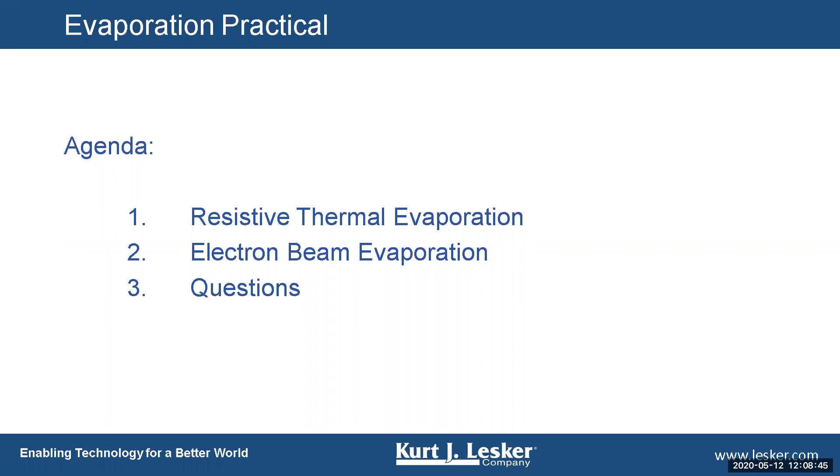So what we're going to cover today, as I said, is resistive thermal evaporation and electron beam evaporation. They're kind of tied together. One kind of technique builds on the other, and I will do my best to explain what you need to know in order to perform these things.

First comment is safety, because a serious matter is that I've known 2 people personally that have died using PVD equipment, and that's as many as I want to know. I don't want to know of anyone else that has died because they've touched the wrong thing at the wrong time. Way back when, this was a very wild and woolly kind of technology, and a lot was left to the imagination. But today, a lot of safeguards are built into equipment, and I'm happy to see that.

So hopefully, like I say, there is a lot of caution that needs, and a lot of respect that needs to be rendered to PVD equipment. Also, a lot of people don't think of it, but in evaporation processes, there's bright light, and the bright light can get quite intense, and there are ways to protect you from overly bright light by using things like welder shade. We use welder shade 9 here in Lesker when we're looking at bright evaporation processes.

So let's start on thermal resistive evaporation. Evaporation is a process where you're going to take a solid material and you're going to vaporize it one way or another, and then that vapor is going to condense out on the substrate and make a thin film, hopefully. Thin film thicknesses and properties are an end product of this process.

Liftoff is generally the intent of most evaporation processes, and the reason why is because evaporation happens at a relatively low pressure, and you get line of sight deposition from the evaporation sources, whether it be a resistive source or an e-gun. The evaporation process should not cause excessive heating of the substrate, because that can be very injurious to

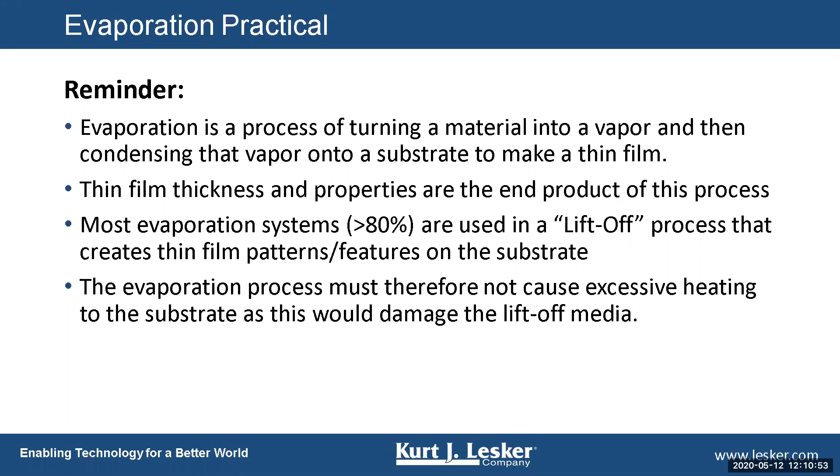certain kinds of photoresist. There are a ton of different evaporation sources. How do you know which one to pick? How do you know which one to choose? We can give you some guidance.

I'm sure you probably already have a general idea, but they're generally classified in 2 major categories. One is directly heated, where the material gets placed directly into boats, baffle boxes, or into spirals, or into coils. You can actually shove little pellets in the coils, and it does work nice. People have made canes out of certain evaporation materials, and they put them on loops to evaporate.

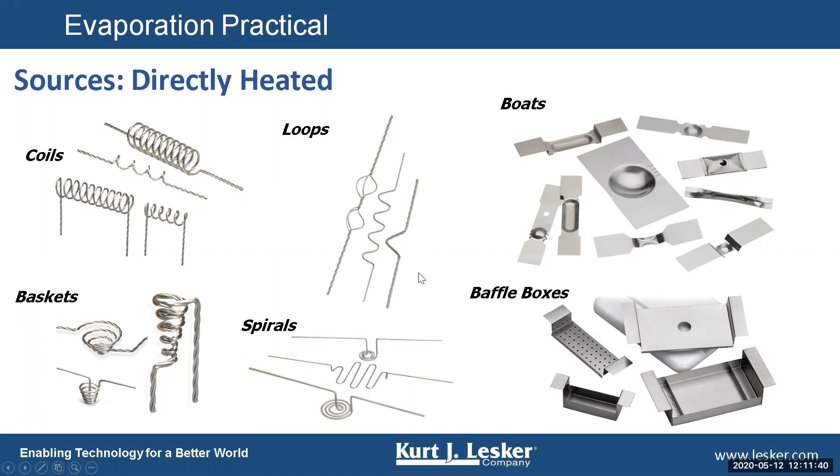The other kind of source is indirectly heated, where you put the material inside of a crucible, and the crucible then gets placed inside of an indirect heated source, a box heater or an LTE or an effusion cell, something of that nature, or a coil basket heater.

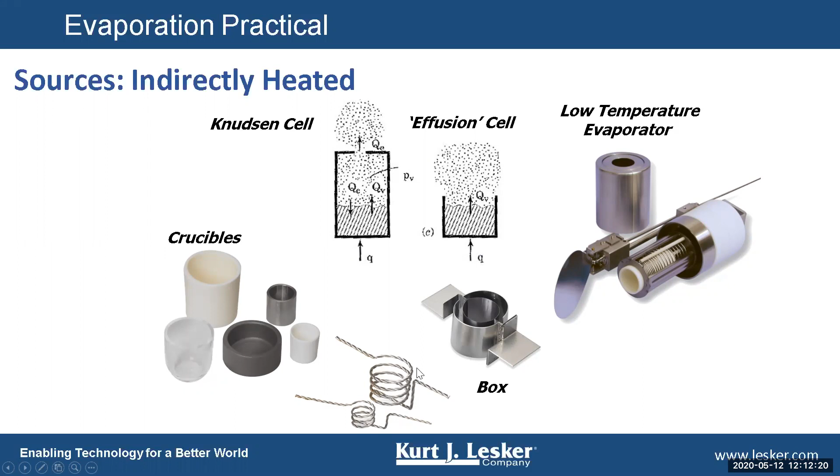Understand that the heat is generated by the resistive source, and it has to travel from the source through the crucible and then into the material. So the thermal conductivity path is a little indirect here, and that's why these are known as indirectly heated sources.

There are many different considerations which source to use, which boat or box heater or coil to use. Geometric considerations are one, how the system is laid out, what size source can the evaporation posts hold, and that kind of dictates where to go from there.

The size of the power supply is important as well. It's really important to know what the voltage and current outputs are for your power supply, and I'll get into that a little bit later, because it will define the boat or an adequate boat that you can use.

Material compatibility is also an issue because certain materials, when they go in liquid form, can interact with boats. If they go into liquid form, they can destroy boats, they can destroy crucibles. I'll touch a little bit on that briefly. The type of material being evaporated also determines really which source is best. And bottom line is the thickness of the film also is going to dictate what size evaporation source or boat to use.

Distance between electrodes: here you see a cluster flange of 3 or 4 evaporation sources, and from post to post the evaporation source spans. This length is critical to know because if you're ordering a new boat or reordering boats, it's important to get the right size boat.

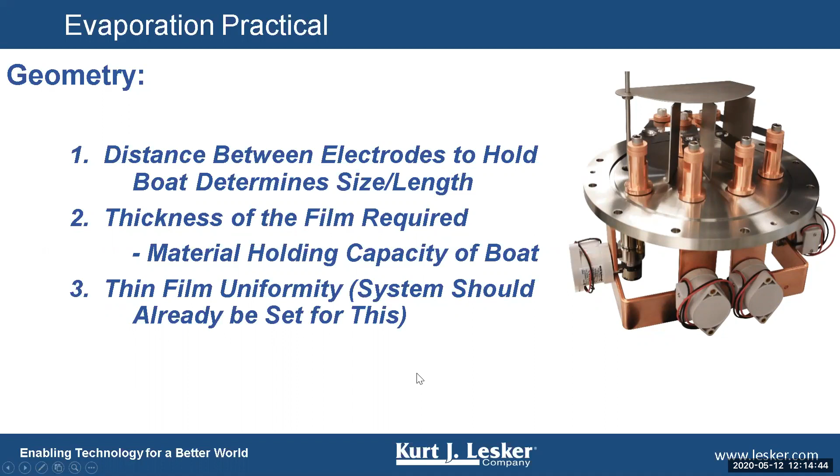Thin film uniformity is also affected by the position of the evaporation sources in relation to the substrate. This should already be set in any system you're currently using, and it should have been designed so you get relatively good uniformity.

All evaporation sources, if you go to anybody that sells them, will usually list on their website or catalog the voltage, current, and power required to get the evaporation source up to a certain temperature. These are useful numbers to know and consider when choosing a boat or box heater.

What happens if your power supply only gives off 2 volts max and it's limited to 200 amps? Certain sources require more than 200 amps to reach a critical temperature, so it's important to consider the output of your evaporation power supply.

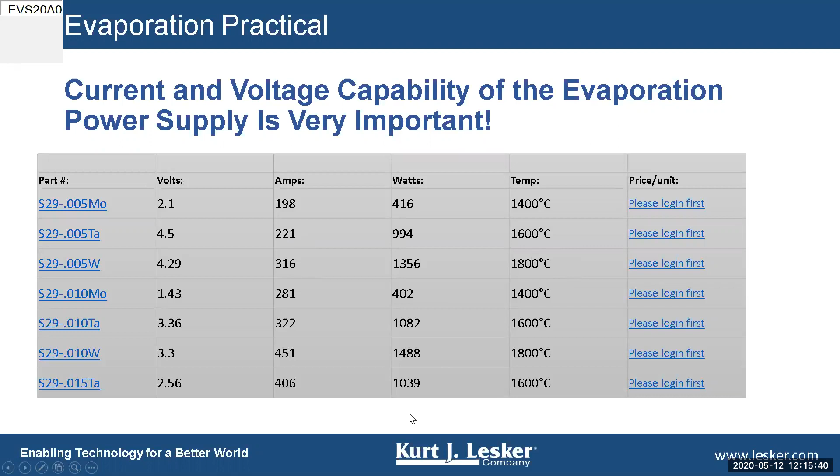When it comes to material compatibility, one considers materials that sublime. Generally, they don't interact with the boat or crucible holding them, and as a rule they work fine in just about any kind of boat or crucible material.

Most materials that melt stand a good chance of interacting with the evaporation source, so you have to be cognizant of that. Generally, experience is a good indicator—people usually know what kind of boat material works with a given material.

Gold, palladium, and nickel generally use alumina coated boats or alumina crucibles to heat them up—we're talking resistive evaporation here, not E-beam. The Al2O3 coating prevents the gold, palladium, or nickel from wetting to the boat, so you can pull the material out in many instances after evaporation, since it doesn't wet to the Al2O3 coating.

Titanium is a common material for resistive thermal evaporation. I tend to only use cheap tungsten boats at least 15 thousandths of an inch thick. You can almost guarantee with titanium you'll only get one use per boat, because it will dissolve, interact with, and pretty much destroy the boat after one use. Generally the layer thickness after that one use—if you're shooting for 100 or 200 nanometers—should be okay, but anything much more than that won't work for titanium, though I realize titanium is usually a thin layer.

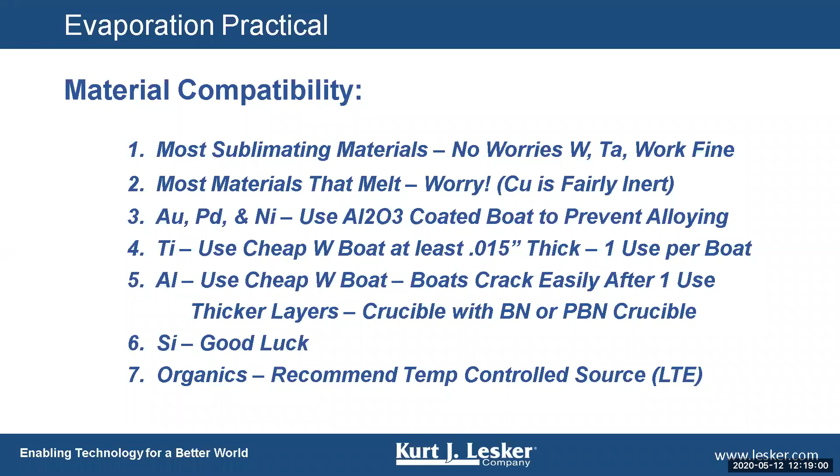When we talk about evaporation, we're basically talking about evaporation rate, which is somewhat equivalent to the vapor pressure of the material. The material's vapor pressure is dictated by its surface temperature. The hotter a material gets, the more it approaches its evaporation point, and the colder it is, the less likely it is to evaporate.

For normal deposition geometries, we consider a material vapor pressure of 1 × 10⁻² torr high enough to give a good deposition rate—I'll show you a chart in a second that covers that. I'll use the term evaporation temperature to mean the temperature required to raise a material's pressure to 1 × 10⁻² torr.

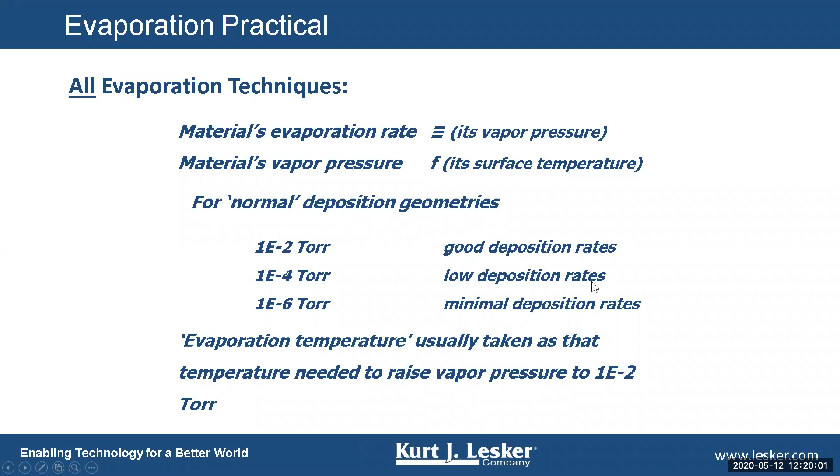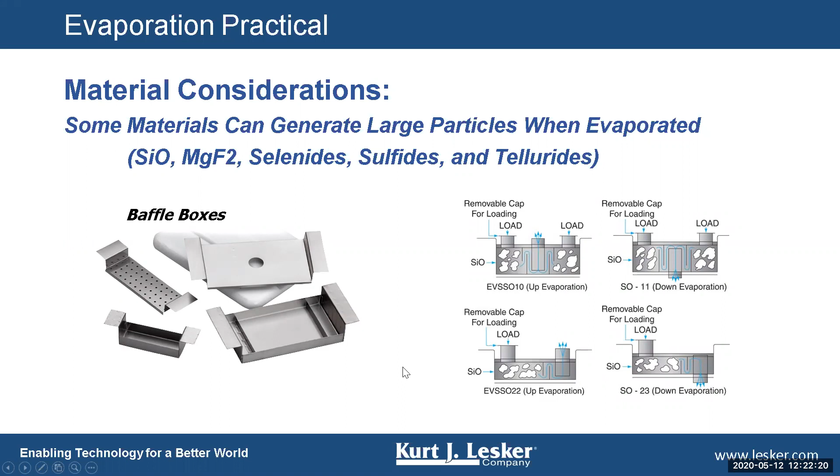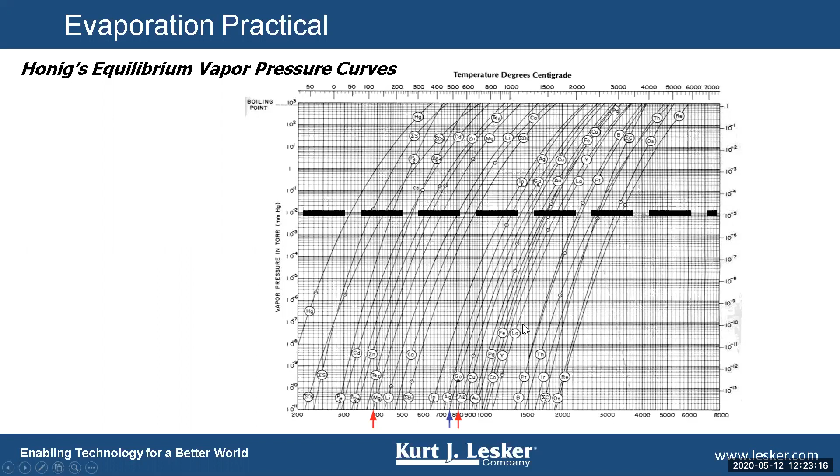When evaporating alloys, they really don't work too well unless their vapor pressure temperatures are relatively equal. For example, if I could make an alloy out of osmium and cadmium, and started evaporating it, cadmium would start coming off at around 260 degrees C, while osmium wouldn't even sneeze at that temperature. So if you heat an alloy like that, you'll get all the cadmium coming off and be left with a clump of osmium. More or less that's true — there are some liberties taken there, but more or less it's accurate.

As we covered, organics are better done in a temperature-controlled source where you can apply power and monitor the temperature. There's a thermocouple inside these sources — the crucible sits on the thermocouple, and you're able to heat the source based on temperature.

With refractory metals, a lot of people say, 'I want to resistively evaporate tungsten, tantalum, platinum,' or some other very high temperature material. Most of those are better done via E-beam, and some are quite impossible via resistive evaporation.

I want to caution you — I have a way of doing evaporation I've developed through the years. It's my way, not the only way, and I'm going to tell you how I do things. Please take it with a grain of salt. I'm more interested in the theory behind why I do what I do; the exact procedures I'll leave up to you.

You decide how you want to pattern your evaporation runs, and these strategies apply to resistive thermal evaporation as well as E-beam evaporation. I'll cover this again when we get to the E-beam section.

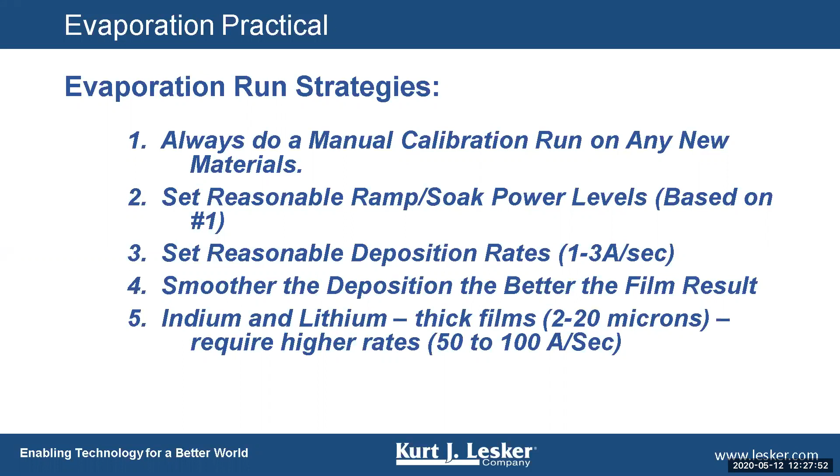So a manual ramp soak, and this is the layout of what I do: I slowly increase the power of the evaporation source until I hit my desired deposition rate, and I record that power level. Generally, most controllers allow you 2 ramp soak levels: ramp 1, soak 1, ramp 2, soak 2.

And at the end of soak 2, I want to have the material conditions such that I am already at my evaporation rate. That way, when I go to PID loop control or auto rate control, my PID loop does not have to search for that control point. It's there. Generally, this produces a relatively smooth transition between the manual ramp soaks and the PID loop control.

The one thing you're trying to prevent is oscillation of the power when you go into PID loop control. Generally, that oscillation in power is caused by soak 2 ending at a power much lower or much higher than the desired deposition rate power.

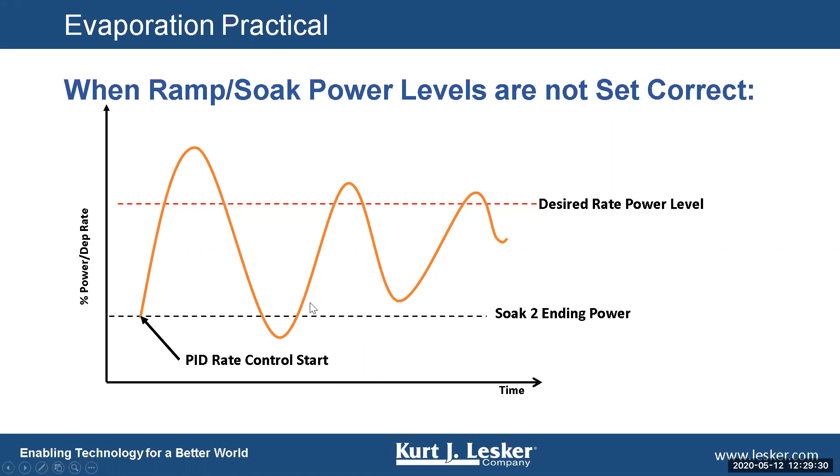This oscillation of power can be very destructive to both the boat or crucible holding the material, as well as injurious to the film you're trying to make on the substrate, because in these wide power swings, you'll get material spitting. Generally, you'll get large particles included in your films at this time.

Some of the quirks and qualms to any kind of evaporation process is that if you have to vent the system, sometimes the materials you're evaporating can form oxides or nitrides readily when exposed to ambient air. This might require an additional ramp soak in order to first burn off or burn through that oxidized or nitride layer when you go to reuse this material. So try to keep that in mind.

Generally, if something evaporates at, say, 20% power, and it's consistent 20% power run after run after run, and all of a sudden it's taking 30% power, there's something wrong there. Either there's not enough material in the boat, or maybe the material is oxidized or nitrided. Just keep that in mind.

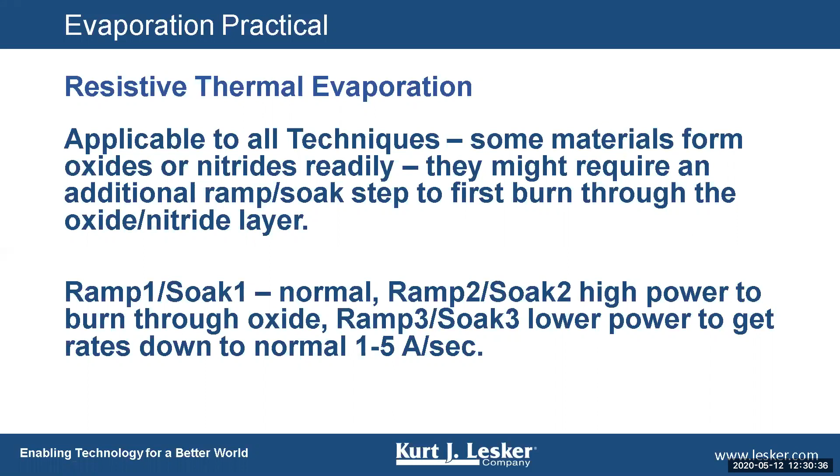Not everything runs off of a 2-stage ramp soak. Some things need 3 steps or maybe even 4 steps.

Atoms, though, have less than 1 eV of energy on arrival at the substrate. This means that film formation can be kind of clumpy, and I'll touch on that a little bit later. But there are ways to augment this energy level either through ion beam assist or heat on the substrate.

Either one can work. You're trying to get a higher energy level so that atoms have more mobility on the substrate and are able to form a smoother film that way.

Rate control generally is dependent on a quartz crystal monitor. It's very important to set up quartz crystal monitors correctly, and I may have the opportunity to touch on that at the end of the talk.

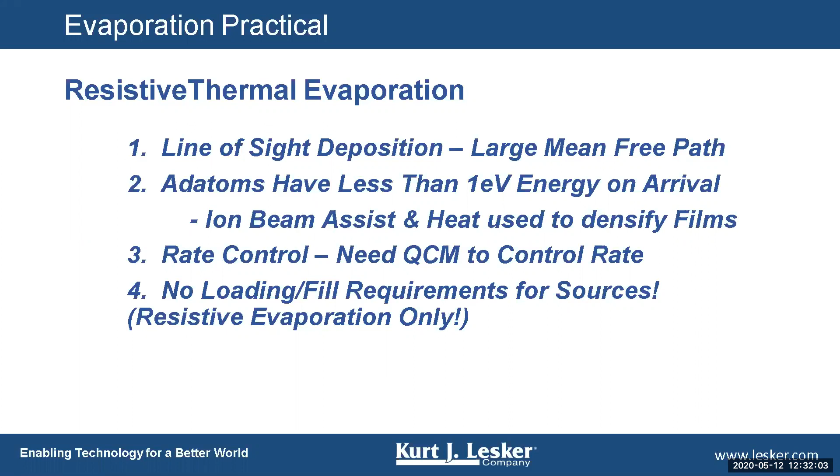In resistive thermal evaporation, and this is what's different from E-beam, there's no loading or fill requirements. Basically, you only put as much material in as you need to make the film thickness that you require on your substrate. One can do that calculation as well, and I will touch on that later.

On the Thornton film growth model, you're dealing at the low energy level with thermal evaporation. So basically, you're getting columnar film structures that can be smooth or not. Generally, you're in zone 1 or zone T, early stages of zone T, depending upon the material.

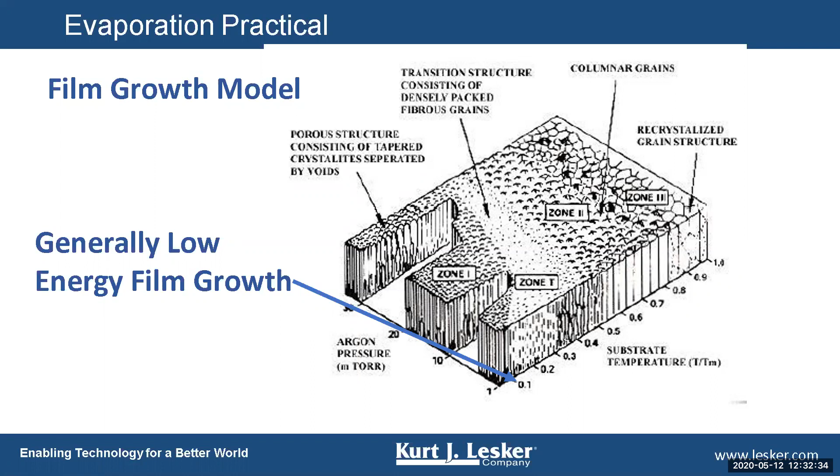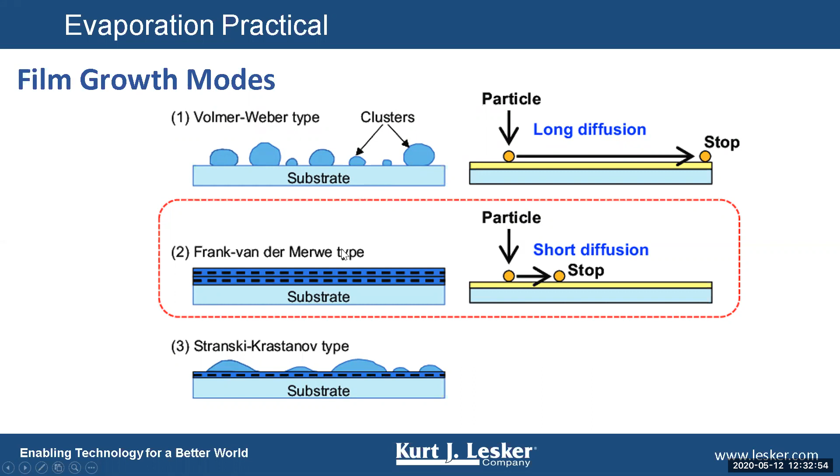Everybody tries to work toward Frank-van der Merwe type film growth, but generally with resistive evaporation, at low energy level, you're going to probably get a combination of Volmer-Weber and Frank-van der Merwe type film growth.

An important factor in any evaporation process is what base pressure do you start at? I ask this question of most anybody I encounter, especially if they're having trouble with film quality. What's your starting base pressure? If I start my evaporation process at 1×10⁻⁶ torr, the natural arrival rate of water vapor coming off of the walls at that base pressure is enough to accrue 1 monolayer of water vapor at the substrate every second. That's a very heavy duty water vapor flux, and there's very little you can do about it.

There are 2 ways around a high water vapor flux. One is pumping down to a lower base pressure. At 1×10⁻⁷ torr, I form 1 monolayer of water vapor at the substrate every 10 seconds. At 1×10⁻⁸, I'll form 1 monolayer every 100 seconds. So I can pump down to a lower base pressure, or I can run at a higher evaporation rate, and that will tend to dilute the contaminant water that's present in the vacuum system.

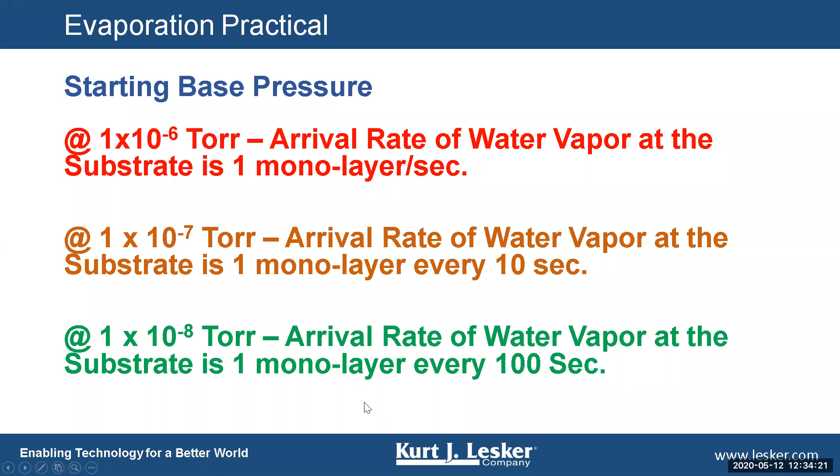Common problems with resistive thermal evaporation are stress on the boat or the basket heater when tightening down the source into the system. There is a trick there: you want to try to keep as much torque off of the boat or basket heater as possible, while still getting a good tight connection between it and the evaporation post.

Generally, when somebody has trouble with excessive power requirements, one of the things that might be occurring is they don't have the ends of the boats tight, or the electrical connection made well enough between the post and the boat.

You can also overfill evaporation boats, and this is especially true the smaller the boat size gets. Ultimately, you can bridge the distance between the electrodes with the material you're trying to evaporate, especially if it goes into liquid phase before evaporating. Picture a small boat filled with 20 copper pellets. If I heat the pellets high enough so that they melt, I can get a bridge of copper between both electrodes, and the resistance of the boat will go down. You'll need a lot more current before I can get the copper to evaporate finally, and I might be out of the current range of my power supply.

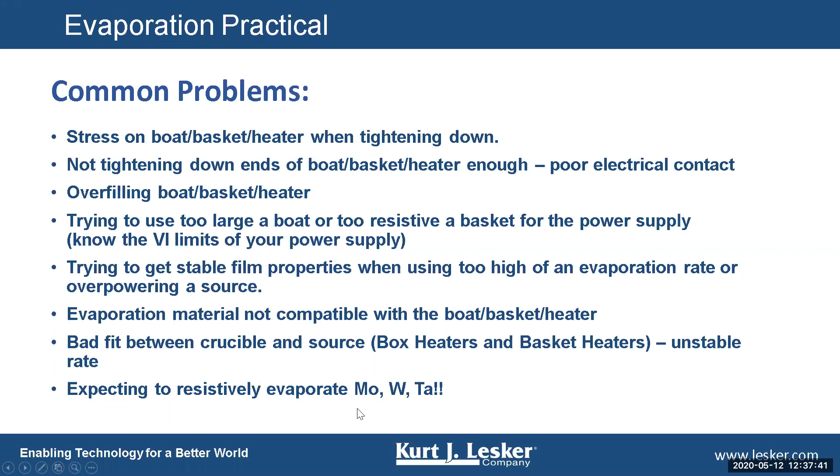How much material do I load in the source? If I only need to put in the evaporation boat as much material as I need to make a film of a required thickness, how much can I calculate that? And the answer is yes.

If one views the distance between the boat and the substrate as a hemisphere, and calculates the surface area of that hemisphere, then adds the thickness of the film I would like to make, all in centimeters, I can get a volumetric calculation of how many cc's of material I need to create that layer of a given thickness. I usually add about 20% more to be safe, but it's quite easy to calculate.

So that's a quick tour of thermal evaporation. If anybody has any questions, please save them to the very end. And if there are no objections, I'll continue on to electron beam evaporation.

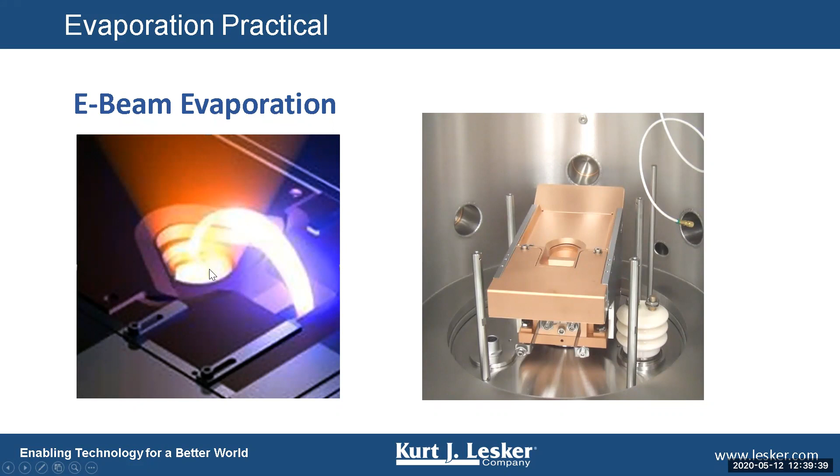This is a neat picture of the electron beam crashing into the pocket that holds the material. And this is a little bit better diagram of how this actually happens.

You have an electron emitter, which is a tungsten filament. You run a relatively low voltage, high current through that filament, and you bias it with a high voltage in reference to the anode section. What happens is an electron beam starts coming out of this filament.

This beam is somewhat guided by the anode optics. It's also guided by a permanent magnet that sits in the back of the E-beam gun, usually. The beam is curled or turned via the magnetic field, and it's steered by an electromagnet that usually exists in front of the gun to create the sweep patterns.

Very basic view. The thing to note here is that the electron beam gun is actively water cooled, and the hearth pocket that the crucible sits in is actively water cooled as well. This tends to keep the crucible liner, the material-holding crucible liner, relatively cool.

So the interactions between the material I'm E-beam evaporating and the crucible liner are somewhat minimized by the fact that this crucible liner is being water cooled.

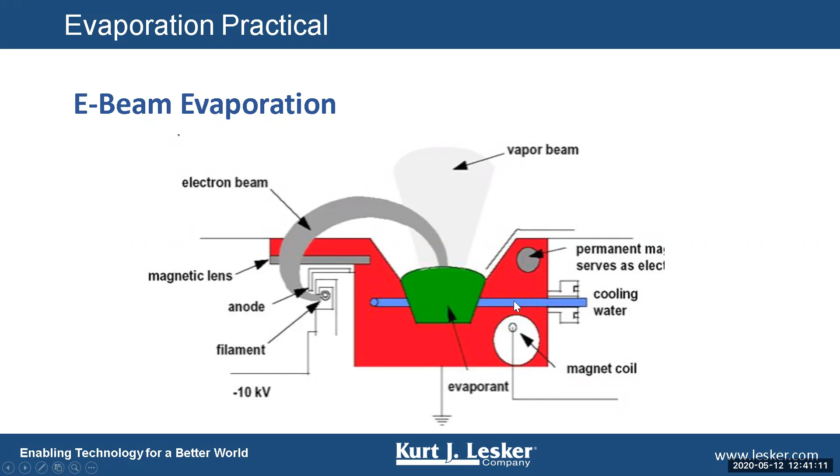It's been my claim that electron beam evaporation is probably one of the most complicated techniques in PVD. It's not well understood. People think, hey, I push a button, the power comes on, the beam is generated, and poof, my material evaporates.

It's actually a lot more complicated than that. The other drawback to E-beam evaporation is it usually runs off relatively high power, and at high power the danger of damaging the E-gun or the system increases. So E-beam is a very useful technique, but it can also be a very destructive technique if you don't use it or don't understand it.

Most any material, including refractory metals, can be E-beam evaporated. But higher vapor pressure materials, materials that need very little heat to get large vapor pressures, are usually not a good choice for electron beam evaporation.

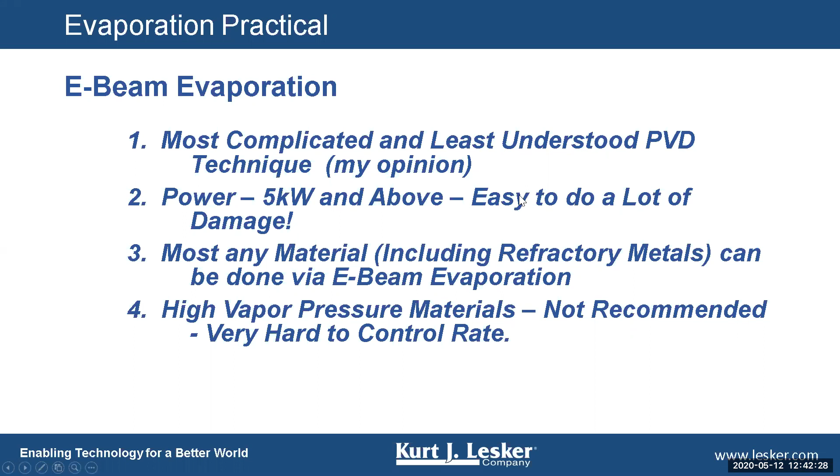If you can understand the thermal conductivity through the E-gun, you will be able to evaporate any material you want in an E-gun, even using a relatively small power supply. Thermal conductivity through the E-gun is very important to understand because it'll explain any kind of aberrant behavior you might see.

Basically, when the beam hits the material inside the crucible liner, the heat is transferred through the material, through the crucible liner, and then into the water-cooled hearth pocket, and hopefully out of the coolant into your cooling system.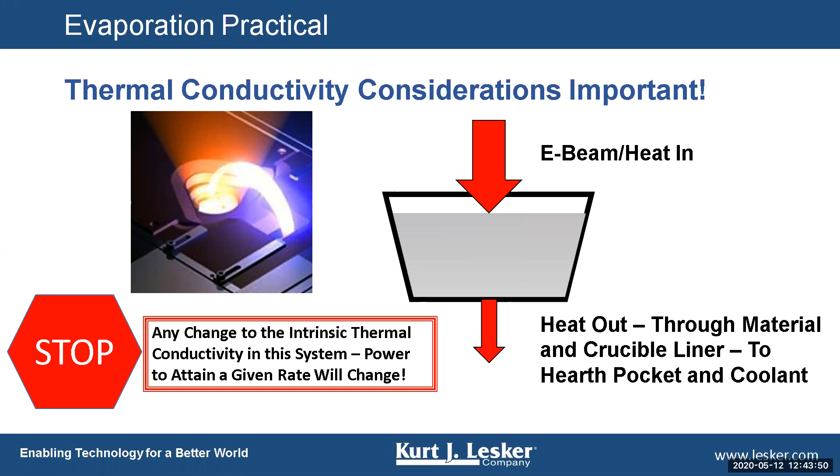So any change to this intrinsic thermal conductivity path will lead to changes in power needed to get a given rate. A lot of people have problems with consistent power for a given evaporation rate in E-beam, and generally it's because the thermal conductivity equation has changed in the E-gun.

A couple of different ways that can happen is if the crucible liner cracks, you can get material leaking out of the cracks and that touches the hearth pocket directly. When this happens, it'll require more power to get to a given evaporation rate, primarily because the thermal conductivity has increased.

Also, if I overfill the crucible liner, I tend to splash over it, and the material can then directly touch the hearth pocket as well. This creates a good thermal conductivity path, and again I'll need more power to evaporate the material at a given rate.

Some people are very poor housekeepers, and they can let material accrue in the hearth pocket area. I've even seen an instance where somebody left a pellet in the pocket, tried to put the crucible liner into the pocket over top of the pellet, and got all sorts of disastrous results because of this. So in these instances, the thermal conductivity path in the E-gun has changed, and it will cause a change in the evaporation rate.

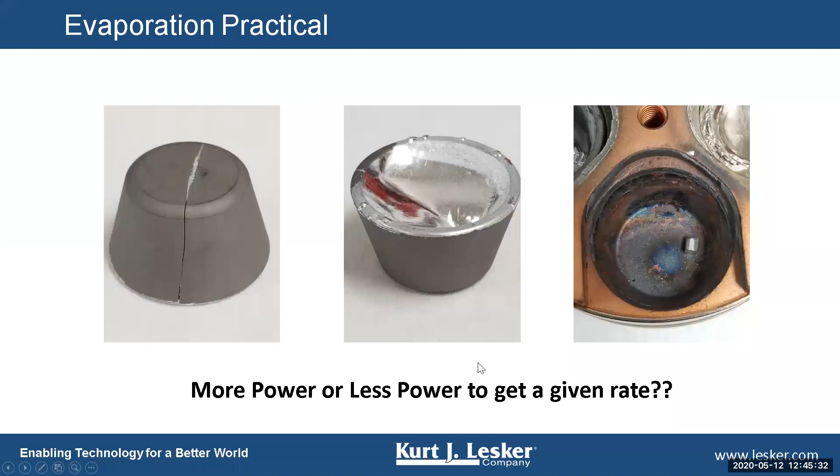E-beam evaporation guidelines are basically the same as the resistive thermal guidelines. A smooth process is always desired. You have a couple of different manual ramps and soaks that you can play with. Also, you need a quartz crystal monitor to help you control the rate.

There is a fill requirement on these crucibles that go into the E-gun. Generally, as a rule, you want to make sure the crucible is at least two-thirds full of material. A lot of people, when they go to E-beam gold or platinum, might only put one or two pellets in the crucible. It can work that way, but generally what happens is the beam interacts with the crucible and you wind up contaminating your material or destroying your crucible liner.

Generally, as a rule, I like to use higher voltages if you are running an E-gun where you can change the voltage. The higher voltage is generally used for metals, 8 to 10 kV, and then lower voltages are usually reserved for sublimating materials.

Key here is when you change the voltage in any given pocket, you have to redefine the beam limits. If you don't redefine the beam limits, your beam can wander in or out of your pocket. So if you change the voltage that a pocket works at, it's very important to reset the pocket limits.

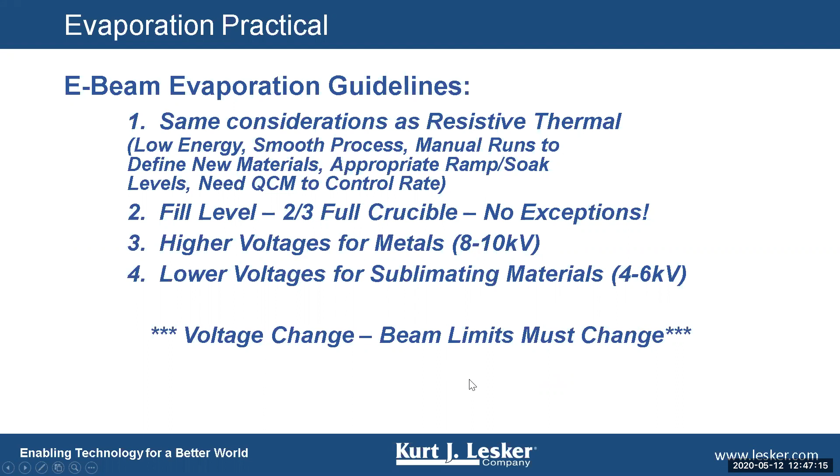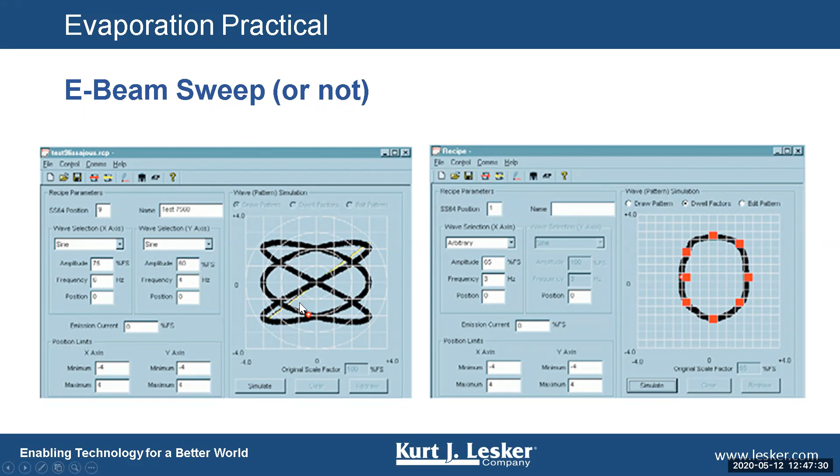People are overly fascinated with the ability of an E-gun to sweep its beam. I try not to pay a whole lot of attention to that. Generally, as a rule, I use a sweep for sublimating materials.

For materials that sublime, like Al2O3 or SiO2 or even chromium, I try to use as diffuse a sweep pattern as I can make. Generally, the E-gun allows you to do various things to diffuse the sweep. I also use a very slow frequency and a relatively large amplitude for the sweep.

This is all in an effort to abate core drilling through the material. It's quite possible to core drill through sublimating materials and then drill a hole through your crucible liner before you reach your layer thickness goal. You don't want to do that — you endanger the E-gun when you do that.

I use a sweep to pre-melt most metals though. Usually some metals don't melt at relatively low powers, like titanium. What I'll do is fill the crucible liner up with titanium pellets, then manually ramp the power of the E-gun up, and manually steer the beam around the pocket to pre-melt the titanium. My theory on this is the smoother the surface of the melt, the more consistent my evaporation is going to be. Not quite possible with sublimating materials, but with metals that melt, I can do a pre-melt, and usually the evaporation process runs smoother that way.

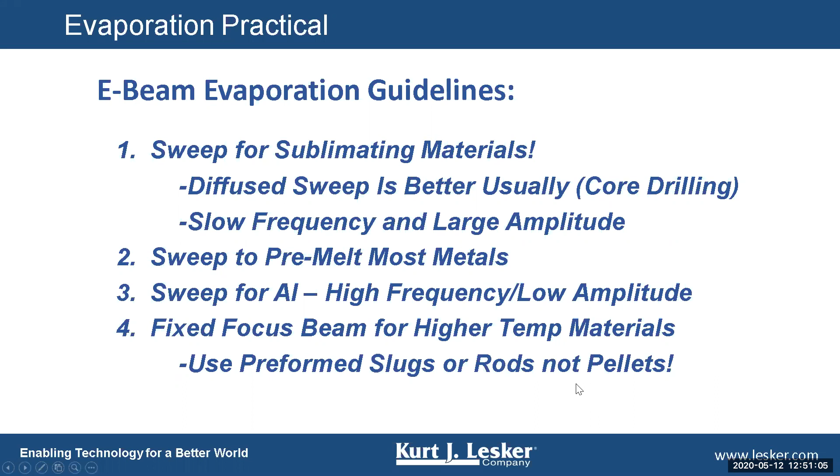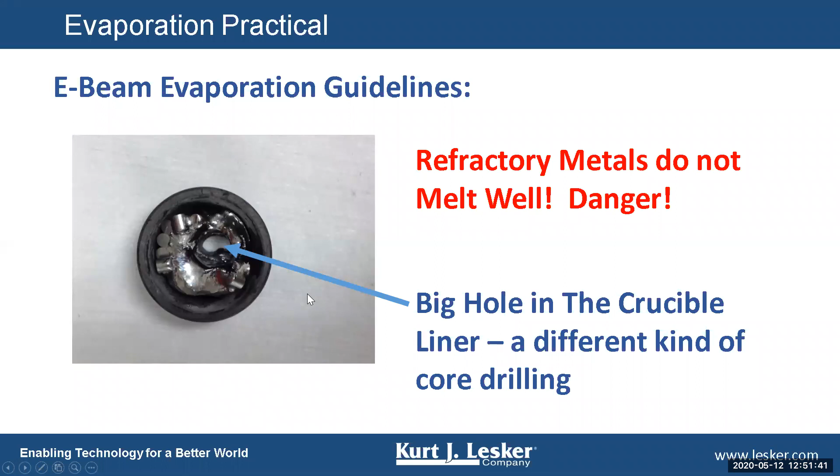This is a picture of something that I did. I believe this was molybdenum, moly pellets, and I turned up the heat, and the pellets just sloughed away as they were melting, and it exposed the bottom of the crucible. This happens in a few seconds—it can happen in a few seconds at high powers on your E-gun, and the results can be quite disastrous.

The same basic plan applies to resistive thermal evaporation. When I'm dealing with a material I do not know, I will always do a manual calibration where I'll run the power up on the E-gun manually until I hit my desired deposition rate, and I'll note that power—that'll be my ramp 2 soak 2 power. This is in an effort to get a very smooth evaporation process once I go into PID loop or auto control mode.

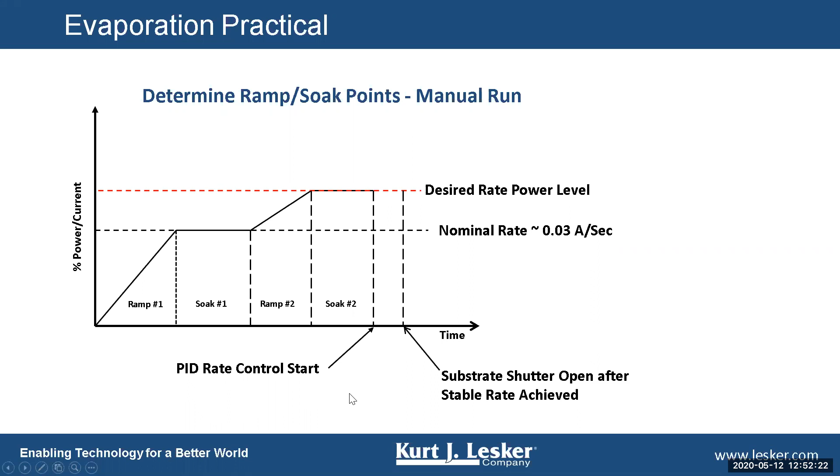In E-beam evaporation, if I get oscillations when I go into PID loop control, these power oscillations can cause the material to go from liquid to solid quite rapidly. If the material wets to the crucible liner, like aluminum, these rapid transitions from liquid to solid over the course of a couple seconds will tear apart any kind of crucible material—it'll happen to metal crucible liners, it'll happen to graphite crucible liners. So the point is you want as smooth an evaporation rate as possible once you go into PID loop control, to avoid these power cycling, power ringing kind of events.

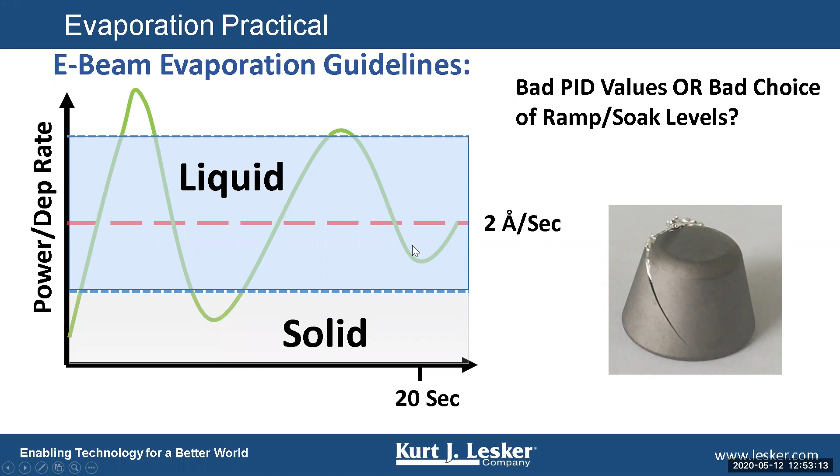With electron beam evaporation, you can get ungodly rates if you want. I've tried and gotten 200 angstroms a second easily with aluminum using an E-gun. At those higher rates though, the films come out terrible—I can't overemphasize that enough. I've been doing E-beam for quite a long time, and most of the films I've made usually work better at relatively normal rates, which I classify as between 1 and 5 angstroms a second. On E-beam, it's quite easy to control the rates on good thermally conductive metals down to 0.1 or 0.01 angstroms a second if need be, and I've done that as well. It's just a matter of doing the manual calibration and having a good calibrated quartz crystal monitor.

However, when you're doing materials that sublime, it's generally easier to set the desired deposition rate a little higher, between 2 and 5 angstroms a second, because sublimating materials don't happen off of a very controlled, smooth surface—they happen off of a very irregular shaped surface, and the thermal conductivity through that material is very poor. So sublimating materials like Al2O3, SiO2, generally in an E-gun require very low powers because the thermal conductivity through the material is quite low. All the heat resides or plays on top of the material, and it causes the rates to go up quite high for a very low power setting. For sublimating materials, I generally try to set the voltage as low as I can on the E-gun, which gives me better current resolution and better control over the rate. I can explain that in greater detail if need be.

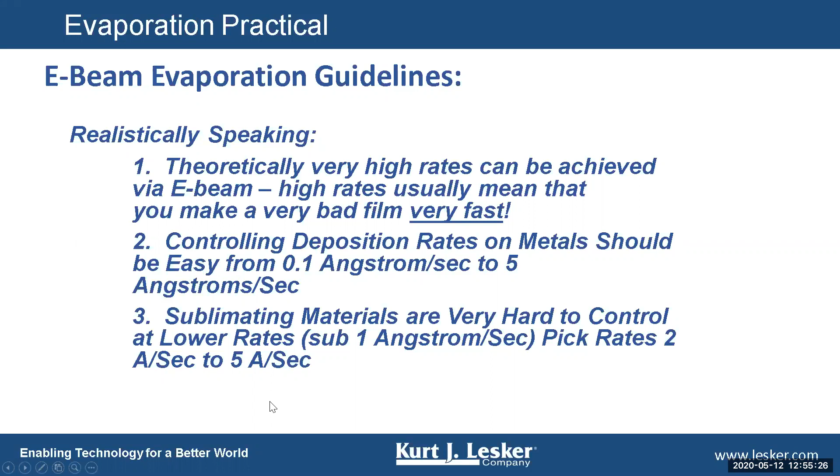Basically the same kind of film growth model applies. In E-beam evaporation, the atoms still have less than 1 eV energy when they get to the substrate. So usually if I'm trying to make super smooth films, I'm going to need to heat the substrate or maybe even let an ion gun assist help me out there as well.

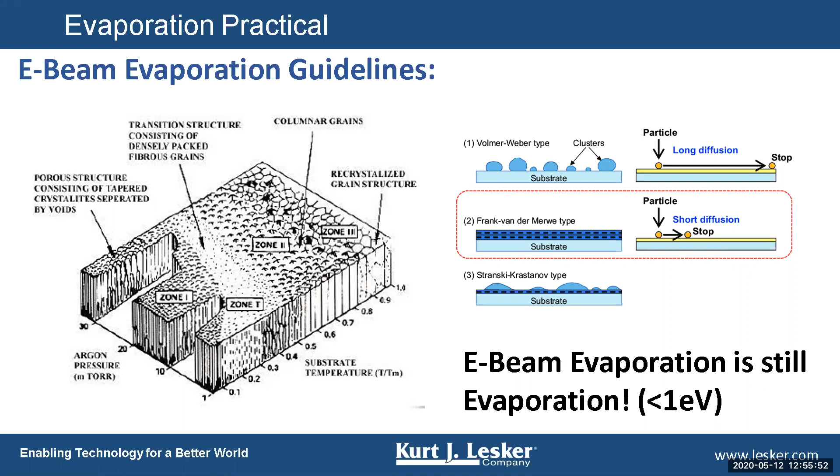There are many kinds of crucible liners, all sorts of different materials, from metals to insulators to graphite, fabmate. Which one do you use for a given material? That's a hard thing to explain. Generally, as a rule, I pick the cheapest because I'm kind of cost conscious, and generally that's going to be a graphite or a fabmate crucible liner. The more exotic the material gets, the higher the price of the crucible liner, and there are also thermal conductivity considerations as well.

A graphite or fabmate crucible liner is going to be less thermally conductive than moly or tungsten. And if it's less thermally conductive, that means I'm going to require more power for a given deposition rate when running a material in a tungsten crucible than I will to get that rate in a fabmate crucible liner.

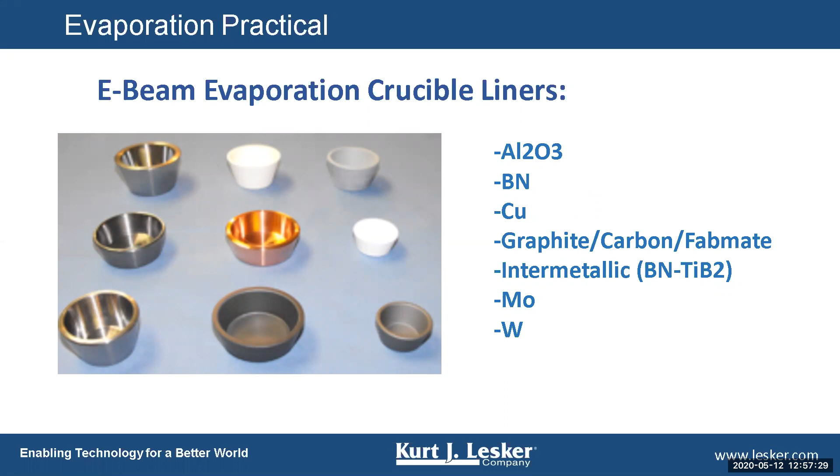So all of this is a strategy you can use. The one thing I will tell you is I cannot recommend using an electrically insulating crucible liner in an E-gun. It produces all sorts of charging effects, and you run into all sorts of weird and flaky problems when using an electrically insulating crucible liner in an E-gun. So my recommendation is to always use an electrically conductive crucible liner when evaporating material in an E-gun.

Again, carbon and fabmate for most materials. Generally, as a rule, I do that. Don't use dielectric crucible liners. They will work on insulating materials, so you can run an Al2O3 crucible liner on Al2O3 or SiO2, and it will work. But you will still get charging effects, and those are quite distressing at times, and they cause different effects in the film as well. So even when doing dielectrics, still use an electrically conductive crucible liner.

When people use carbon or graphite crucible liners and evaporate gold or platinum, there are a lot of reports of carbon contamination in the melt itself. And generally when that happens, people are only putting 1, 2, or 3 pellets of gold or platinum inside the crucible liner, and it's dramatically underfilled. As a result, the beam plays off of the graphite crucible liner and the material as well, and it gets carbon inside the precious metals.

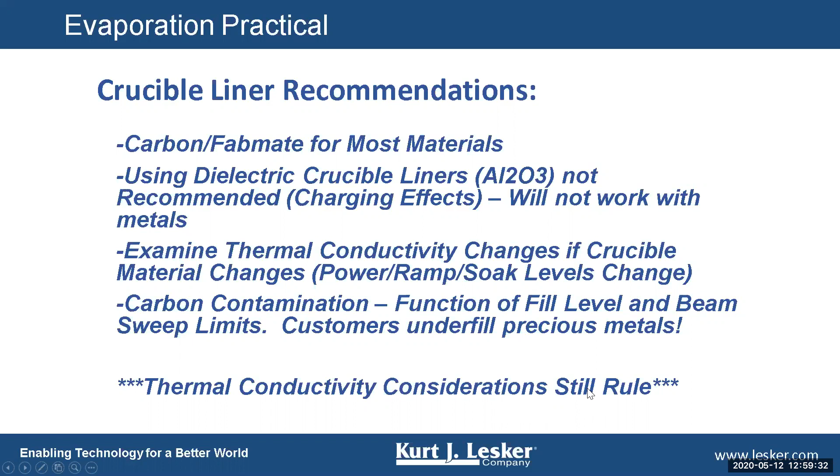With E-beam as a rule, ramp up in power with a lot of care, making sure you ramp up to ultimate power at a relatively reasonable rate. Ramp down in power when the deposition is done as well. If you all of a sudden turn off the power, say you hit your film thickness and just turn the power off right when deposition is done, that instantly cools the material down, and generally that can lead to a cracked crucible. So I generally cool the crucible down at a slower rate than I normally ramp it up.

A lot of people crack crucible liners when it comes to E-beam evaporation, and a lot of it is tied to procedure—turning the power off, or not coming up with good ramp soak levels for when they go into PID loop control.

Another interesting fact is silicon will destroy the crucible liners as well. Even though the crucible liners are relatively cool, as soon as the silicon goes into liquid form, it'll wreak havoc on the crucible liner. Silicon is also interesting in that it'll start growing up toward the beam. I've actually done silicon in an E-gun directly in the pocket and had a giant cone of silicon grow up from the melt such that I could not rotate the pocket to get to my next material. So silicon is just a weird material to E-beam evaporate.

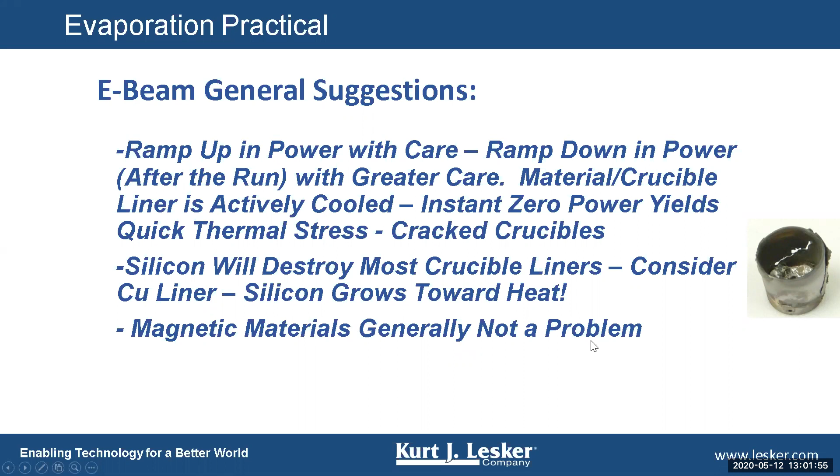Again, just to outline what I recommend for E-beam, special suggestions. Refractory metals, consider using a rod-shaped melt. That's an effort to control the thermal conductivity through the material, limit the thermal conductivity, and get as much energy into these materials as possible.

Fixed focus beam for refractory metals. This concentrates the energy on the material and it minimizes or maximizes the rate for the power usage.

Number two is sweep to pre-melt most materials or most metals. And generally, as I said, I like a nice smooth surface to start with when I'm doing E-beam evaporation, and it usually yields the best results.

So some materials like aluminum, I can just put the pellets in and ramp it up normally. And as the melt goes on, if I'm sweeping, the aluminum will melt thoroughly and it'll melt well. I really don't have to do a pre-melt on aluminum. You might see other materials like that as well, and it's perfectly fine not to do a pre-melt on them.

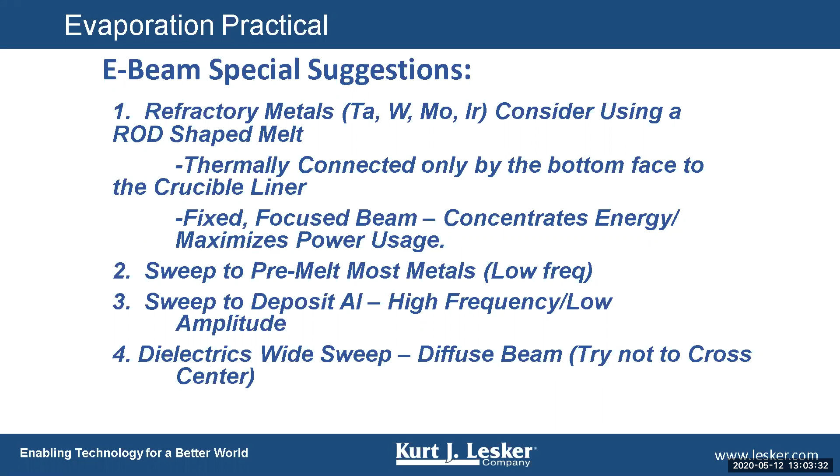Again, dielectrics: wide sweep, slow frequency, a diffused beam, and try to set the deposition rate up a little higher, like 2 angstroms a second or 3 angstroms a second. Easier to control that way.

Process concerns with E-beam: it's a relatively expensive technique when compared with thermal evaporation. And for that expensive technique, the atoms still have thermal energies, usually less than 1 eV. You can get the material migrating over the crucible liner and interacting with the E-gun.

Also, if I'm not careful about the ramp soaks, I can get a lot of spitting occurring when I try to run a film through an E-gun. Certain materials like vanadium and molybdenum will spit, and it's just a waiting game. If I want to run them, I'll keep the power on them a relatively long time to do pre-melts and preconditioning in an effort to overcome the spitting that usually occurs with these materials.

Most alloys must be co-evaporated, and that's true of E-beam as well as resistive thermal evaporation. Compounds dissociate. Usually with the higher energy levels of an E-gun, it's not really a good idea to whack at compounds. And it really does not work well for organics. I don't know of anybody that tries to evaporate organics with an E-gun.

Stable evaporation rate requires a little bit of skill because, like I say, you've got to do the ramp soaks in a particular order or a particular way in order to get a smooth evaporation run.

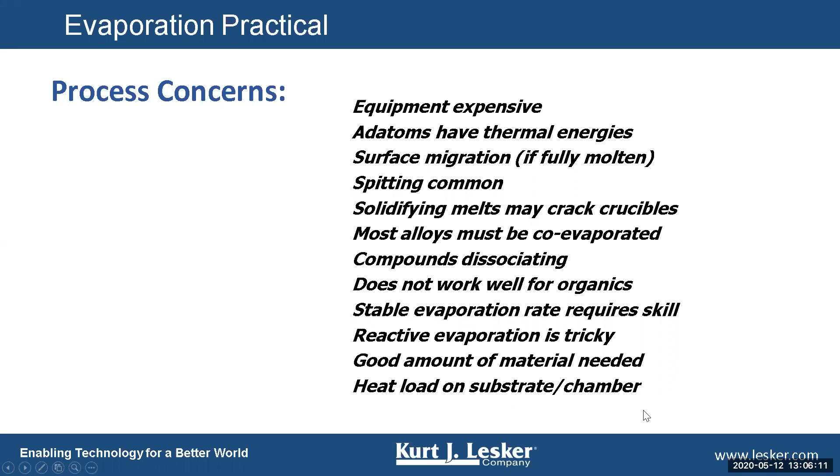Also with E-beam, it's possible to heat the substrate up to quite high temperatures. There's a lot of papers on cross-linking that occurs on PMMA photoresist with E-beam, and there are ways around that as well. If it ever occurs, let me know or talk to somebody in the know, and they can probably steer you toward a technique that gets you out of that situation.

Some common problems with E-beam are usually filament issues or crucible cracking and changing the thermal conductivity. Inconsistent powers, which is usually a problem with poor ramp soak, power levels that are chosen for the ramps and soaks.

The most common problem here is that people think they can reuse the same programs when you're running an auto program. I know a program works well for copper. Maybe I can use that same program for gold. But generally, as I say, the ramp soak levels are metered toward a given material. And as I explained, there can be photoresist issues as well.

Pocket limits: you need to know how to set the pocket limits on an E-gun if you're using it regularly. If you don't know how to set the pocket limits on an E-gun, you really need to ask somebody or have somebody show you this, because it's a very good, useful thing to know how to do.

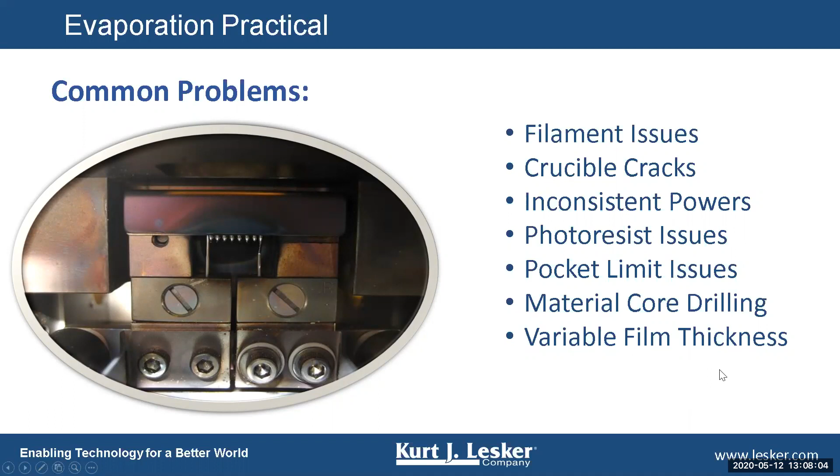And as I showed you in a slide or two, core drilling through the material is quite possible in an E-gun. Also, if the quartz crystal monitor placement is somewhat questionable, it's easy to get variable film thicknesses. So if I set my quartz crystal monitor for 2000 angstroms or say 200 nanometers, and I run a film and get 200 nanometers the first time, successive runs I might get a little bit thicker, and even a little bit thicker film. Generally that's an indication that the quartz crystal monitor is being shadowed either by the melt itself or another piece of equipment inside the chamber.

And that is it. That was a lot of material pretty quick. Sorry for the pace, but if there are any questions, I can entertain them now.

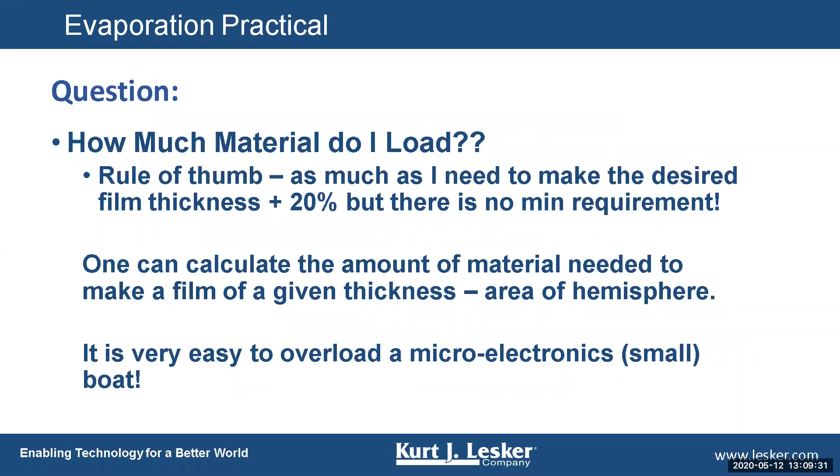The picture you showed looked kind of like a little mini Knudsen cell. Is that how you'd think of it? Yeah, absolutely. Let me make everybody dizzy and go back to that. So it's sort of like a mini Knudsen cell, specially fabricated to hold a crucible. The crucible sits on a thermocouple, and you have the coiled heater around the crucible to heat it up.

To reduce chemical reaction to the source during venting, do you have any recommendations of a waiting period after turning off the power to the source? It just depends on the source and the material itself, but generally as a rule of thumb, I wait 20 minutes. Sounds like a long time, but 20 minutes on either a resistive thermal setup or an E-gun is quite sufficient to cool the material down to room temperature or slightly lower, depending upon the chiller set point, and it's less likely to interact with the ambient atmosphere.

Are there any materials you would run in an E-beam system without a crucible liner? It just depends. Absolutely, you can run material directly in the hearth pocket. Some materials interact with copper, like aluminum and silicon. But I've run a lot of materials directly in the pocket, especially in production. When I worked in the production optics industry, most of our materials stayed set, so we were always running, say, germanium out of pocket number 1 in an E-gun, so I didn't need a crucible liner. I just put germanium directly in the hearth pocket, and that's how I ran it. The drawback is the possibility of cross-contamination if I decide to change the material in that pocket. I still might get a little germanium through that melt.

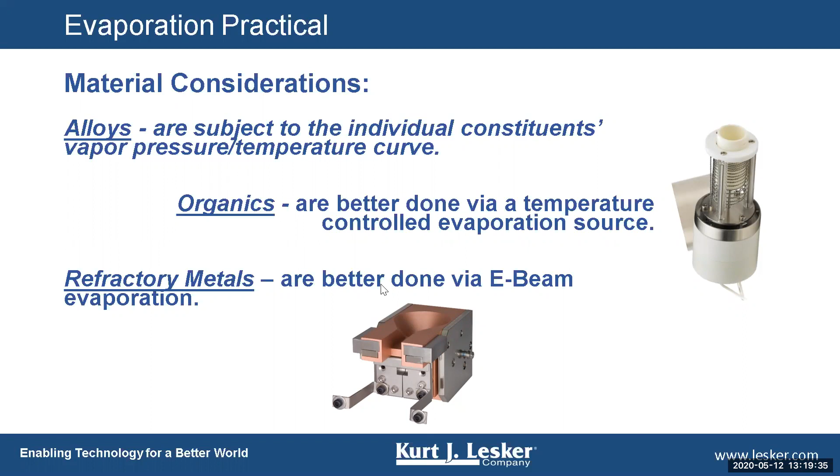Would you comment on any fundamental difference between carbon, graphite, and fabmate? From a practical standpoint, there's not much difference. Regular carbon is a little cruder and more inclined to give you a bit of dirt in the melt as you're doing the evaporation run. Pyrolytic graphite or fabmate cleans that effort up a bit and reduces the amount of cross-contamination, or the amount of carbon that can get back into the melt.

The idea is that if you hit the crucible liner with the beam—I don't care if it's graphite, carbon, or fabmate—you're going to generate material getting into the melt. Usually, since gold or platinum does not wet the graphite or fabmate, generally what happens is you'll develop a scum layer on top of the melt of graphite.

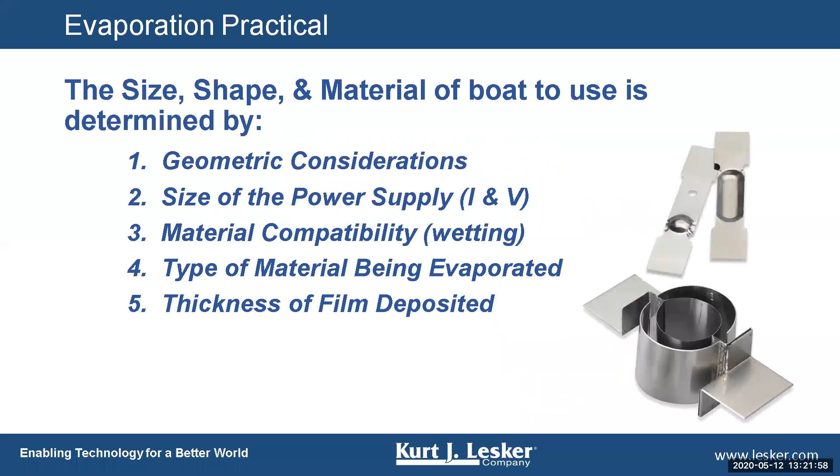As a rule, let me get back to my presentation because I just closed it out. Way to go, Rob. Yeah, I don't know how to get back to it, and I'm not even going to bother.

It'll take too long, but at any rate, generally as a rule, I always have 2 quartz crystals in an evaporation setup. If I'm doing E-beam, I have one to control the rate of the E-gun, which is in the PID loop control with the power supply for the E-gun. The second one is up high and as normal to the melt as I can get it without getting in the way of the substrate, and this is controlling thickness.

So the idea is I have a quartz crystal monitor to control thickness that's near the substrate, and I have one a little bit lower to control the rate with the E-gun. That is my preferred setup.

If, say, I only have one quartz crystal monitor to control the E-gun, and I get it at a very steep angle in relation to the pocket, trying to get it between the E-gun and the substrate—if it's at too steep of an angle relative to the pocket, as the melt goes down lower in the pocket, the quartz crystal monitor can be shadowed by the crucible liner itself.

Generally what happens is the rate will go down on the quartz crystal monitor, but you're still getting a higher deposition rate at the substrate. That's the instance of what I explained before: after successive runs, you'll get thicker and thicker film as the material level gets lower and lower in the crucible. Poor explanation, I understand, but I apologize.